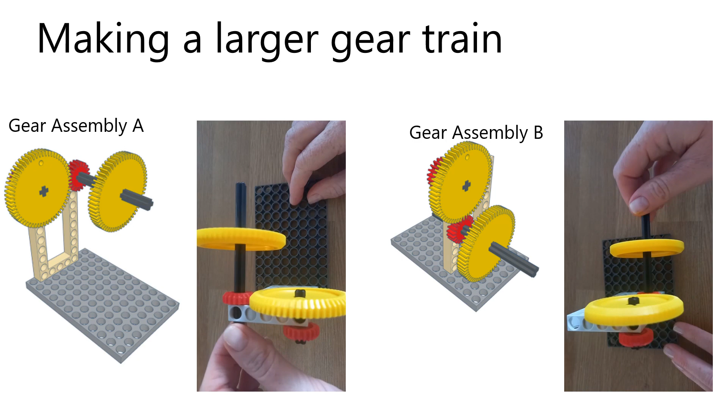Now we need to join our gear parts together. Using the instructions on your sheet, work together with your friends to connect an assembly A and assembly B on the same platform.

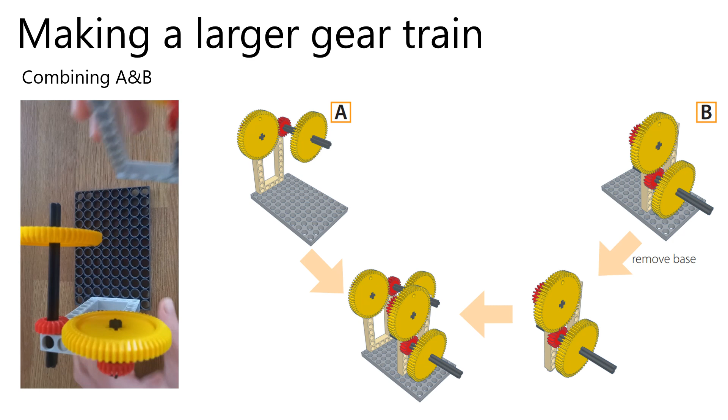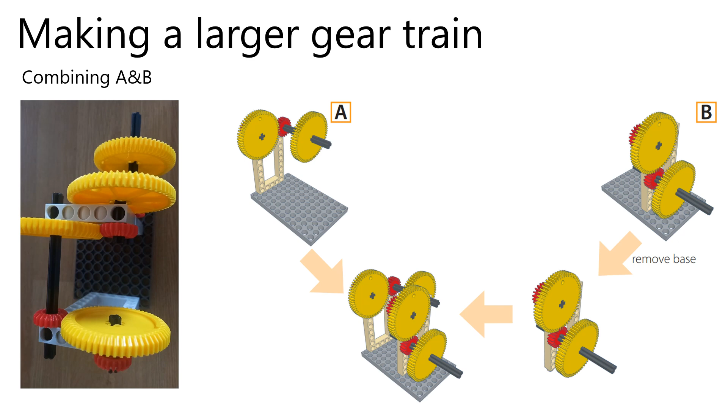We now want to show the children how gear ratios can grow quickly using the machines they have built. As the leader, you can ask the children to bring up their models so you can combine them physically to show the ratios in the upcoming slides.

Depending upon time, you don't have to do this and can just use the slides for reference. We would only recommend building to a maximum of slide 39, as you can't really see the gears moving past this point. Use the next slides to calculate the final gear ratio of the machine the class have built. Please be aware the diagrams are not accurate to the exact model; they are merely to illustrate that the machine is getting bigger.

The children may be able to suggest the next answer by multiplying the current slide by 3, so give them a chance to answer the question. These are big numbers, so it's good to contextualise the numbers periodically to help children understand the ratios. Watch the remainder of this video to see where we have added context at slides 34, 39 and 41.

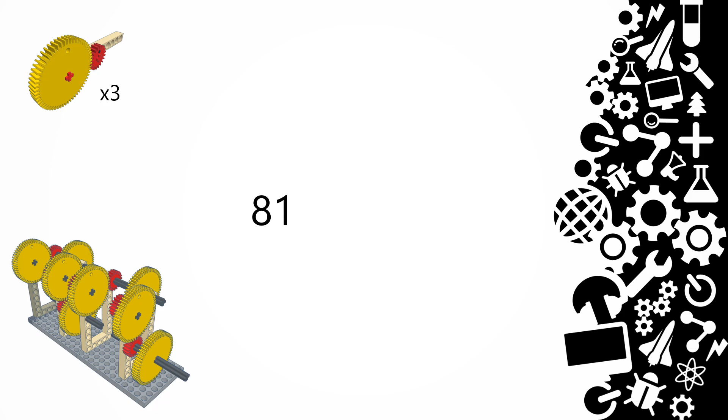As you can see, when we add another gear set, the ratio is getting big quick. Turning the input once per second for this many gear parts would take 5.47 hours. That is almost a full day at school.

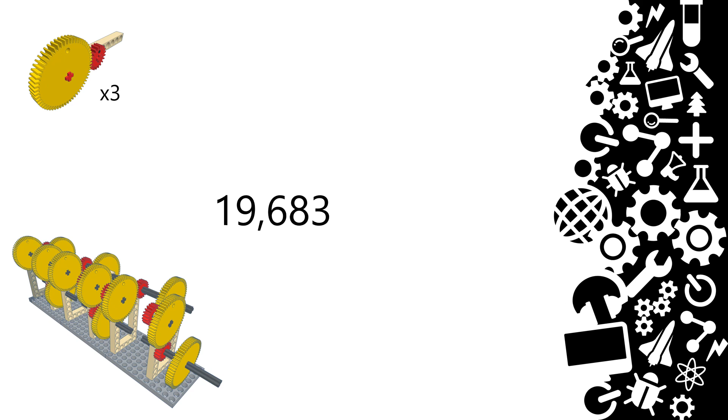So if you wanted to make the yellow output gear at the end of the train turn once, you would need to spend all day turning the red gear. You would even miss lunch.

When we get to this point of adding gear sets, you would need to spend all day, every day, with no sleep for the whole of your summer holidays, turning the red gear once per second to make the output gear make just one rotation.

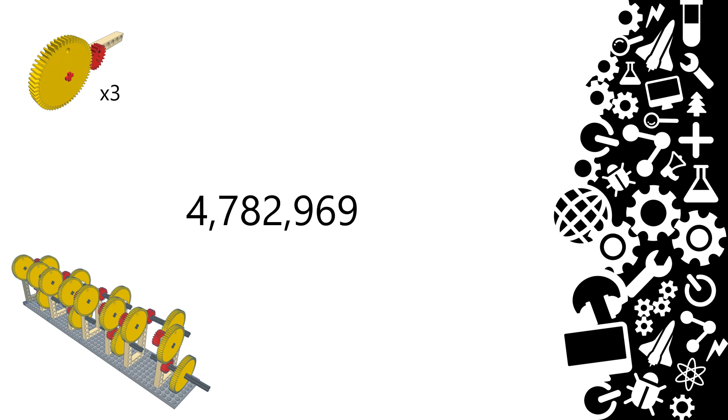So we can see that adding a gear set increases the ratio. But what would happen if we were to put all of the gear trains we have made today together? We would get this massive number.

Does anyone want to take a guess at how long we would have to turn the red gear at a rate of once per second to make the output gear turn? The answer is 27,000 years.

If the class next door were also building a machine in the same way that we have today, and we joined ours with theirs, the time it would take for the yellow output gear at the end of the train to move one rotation would take longer than the age of the universe. And that is how we in the school can make a machine that will run forever.

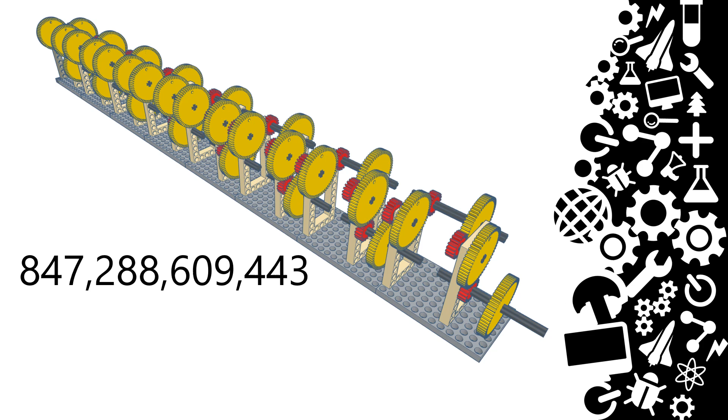This is the end of the Primary Gears workshop, and you've given out a lot of information. Now ask the class what we've learned today. Encourage them to verbalise answers, being sure to compliment them as they go.

Let the class know that the presentation is finished and give them an opportunity to ask any questions. Encourage questions not just about the whole workshop, but about you and your job in engineering, and give them an idea of why engineering could be a choice for them.